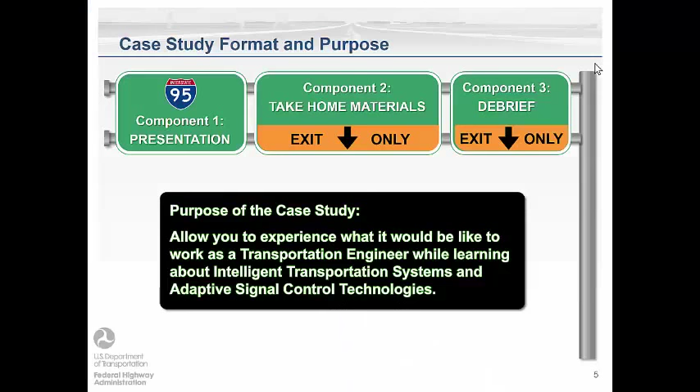So now let's move and talk about the case study. And this case study is focusing on... let's see here, and I apologize, there's a lot of early slides we don't need to worry about here. Now I'm going to move past them pretty quickly.

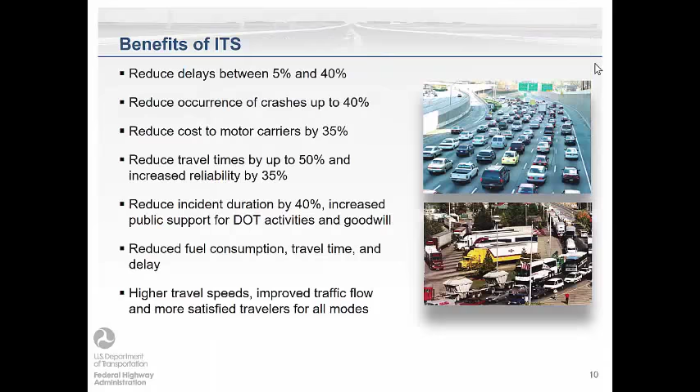Just quickly, the traditional way has been what's called a fixed timing plan, where every cycle you assign so much time to different movements at the intersection. This works well for very predictable traffic flows. We've moved in many cases to what are called actuated signals, where you have a basic timing plan, but you can extend the length of phases based on vehicles actuating detectors. In other words, if you have a green phase and a vehicle comes in within some amount of time and actuates that detector, then that phase will continue to allow that vehicle to pass through. So the idea is to better manage a little bit of unpredictable traffic flows. So you'll see a lot of actuated signals in use, and also there's still plenty of places where you have fixed time signals.

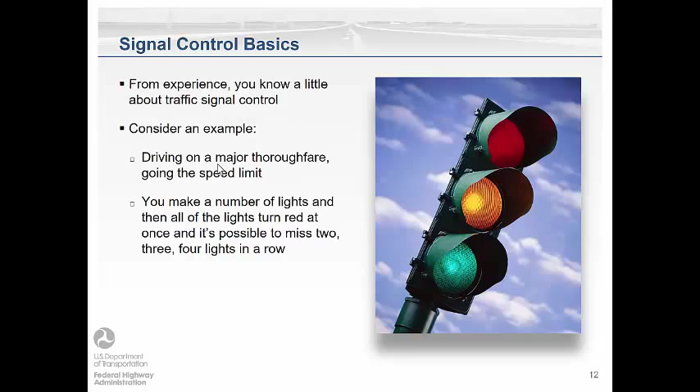There are times, I don't know if you've noticed, when you have an emergency vehicle come through, that gets a preemption, but then it really affects the coordination of signals for a corridor for a long period of time. So this is another issue here in terms of signal management.

Just to fill in the gaps here, we talked about time-based, where you had a control plan based on time. We had traffic responsive, where you're trying to manage more based on actuation, responses to traffic flow. Traffic adaptive is what we're going to talk about in this particular module.

In traffic adaptive, what we're really trying to do is the highest level of coordination. There are physical connections between your intersections and the algorithms where you're looking at demand and modifying your signal timing plan on a real-time basis. So you're constantly looking at what the actual demand is and modifying your plan to meet that demand. If you're in a very predictable corridor, traffic adaptive does nothing for you, because it's predictable. You're not going to be adapting because there's nothing to adapt to.

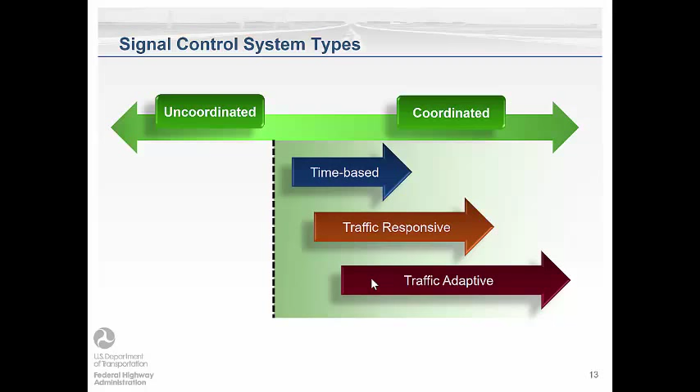If you're in a corridor where you have lots of fluctuations, this can be very, very useful. Again, what does traffic adaptive signal control need? It needs a higher level of input data - what are the demands out there? It needs a better controller to do the search and the optimization. But it's certainly something we can do today with the technology we have.

Because typically they are running fixed time because you have very predictable, highly congested areas. You really can't play around with timing plans to favor one corridor or another - every direction has high demand. But the message here is that there's a lot of work to be done, and there's been a lot of attention paid on using ITS, the idea of better detectors, better monitoring, higher level of computing performance to better adapt signals to the current demands.

We're going to talk about that in this case study. For example, we're involved right now at UVA in what's called the MMITSS project, the Multimodal Intelligent Traffic Signal Systems project, which is a connected vehicle-driven adaptive signal control system that's being prototyped in at least 3 states now, in California, Arizona, and Utah.

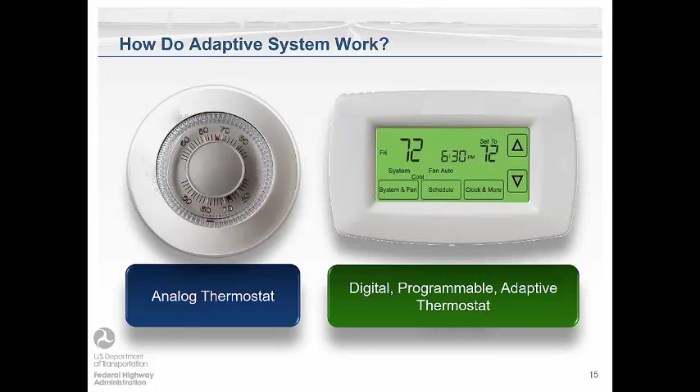Moving on from the Los Angeles example, adaptive signal control technology is effective when you have varying levels of demand that you want to be able to adapt to quickly without doing a retiming effort.

How much does it cost? The cost is at least $50,000 per intersection above the current infrastructure. Where does that cost come in? Primarily from the higher level of detectorization, also from the software complexity and complexity of personnel to set this up.

Now, the issue is this cost should be going down as we get to connected vehicles, because we're going to have a higher level of resolution of data that's not coming from sensors, it's coming from the vehicles themselves. So we really think this is something that's going to be very cost effective in the near future. In fact, even without that, $50,000 per intersection is a drop in the bucket compared to what it costs for construction of lane miles. So this can be a very useful system.

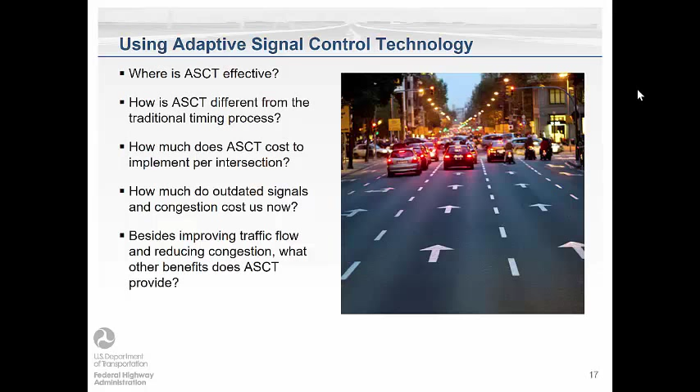So again, what does an adaptive system do? What it does is compare the demand from one time period to another and try to figure out what works well. Does what works well at 5:30 also work well at 3:30? Perhaps there's a traffic pattern that matches that time, maybe it's a Friday with people leaving early, or maybe there's a special event. In many cases, you're trying to find patterns that match pre-timed patterns in your system that you can adapt and quickly modify to, regardless of the time of day.

The purpose of this case is not to get you to a high level of knowledge of adaptive signal control systems, but rather to help you work through some of these issues at a higher level. It's also important to note, as you saw in last unit's application description project, the SCATS system from Australia is an example, one of the oldest examples of a good adaptive signal control system, which you've already seen in this class.

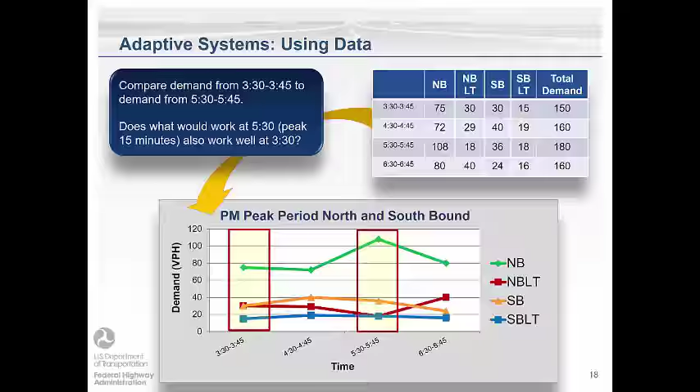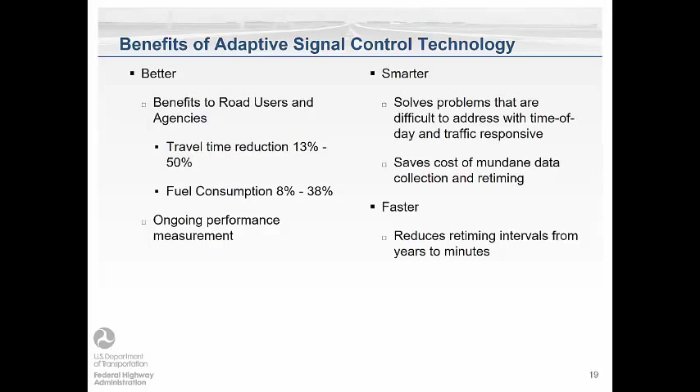How does this benefit us? First, it can reduce congestion and fuel consumption. It can keep us from having to do so much work on traffic timing. The current state of practice is you need to go out every year or two and retime your signal system, which involves a lot of counts and optimization with something like Synchro. If we can have this automatically done on an ongoing basis, it's more effective and more cost effective.

What are the challenges here? It is more complex, which is difficult sometimes for DOTs to manage, and requires personnel ready to handle this. Sometimes your current traffic control system, your controllers, your detectors, are not able to handle the needs for an adaptive control system. Again, it's new, and anything new is difficult sometimes.

This second to last bullet is important: arterial volumes might not fluctuate enough to warrant ASCT. It might not be the best choice for all locations. I can tell you one of the leaders in this area used to always say he would take a well-timed fixed time corridor over an adaptive system any day, because his thought was if you have a corridor that's predictable, with pretty much the same patterns day to day, and you put a lot of effort into developing a good timing plan, that will always outperform something generated on the fly with an adaptive system. So the point is there are many corridors that don't fit that description and need this level of adaptation.

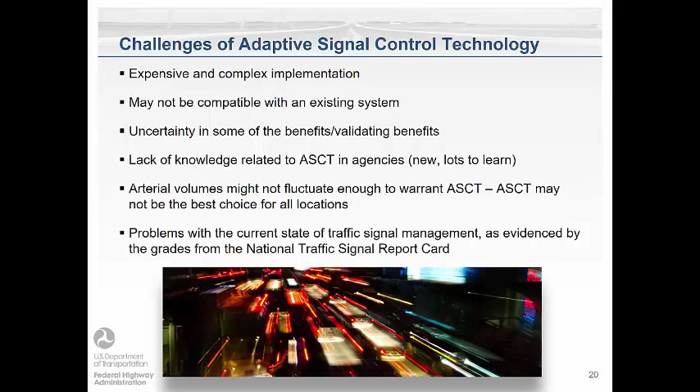The next slide is really getting into the case study itself, though I've lost some of the notes here. What I'd say is think about this with respect to the systems engineering process. How do you put this together in a systematic way? How do you look at the needs first? How do you look at the interfaces, etc.?

Again, a goal-centered approach, starting with a high-level goal, moving down to technical tactics. So for this case study, you're playing the role of a junior traffic engineer in a city known as Hamilton, where you have traffic problems on the main arterial, and you have proposed an adaptive signal control system at 15 of the intersections along that main arterial. You're playing the role where this is going on, in this particular scenario.

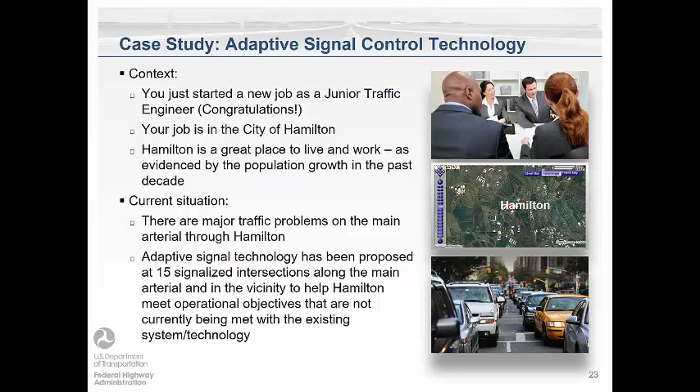So you've got 4 tasks. The recommendation is about 30 minutes per task: looking at your role and responsibility, looking at the patterns themselves in existing signal architecture, looking at operational strategies you can use, and finally comparing and contrasting adaptive and non-adaptive technology systems.

So that's a quick run through the case. Again, you're going to be doing this by yourself. Basically what you're doing in this scenario is reading the material you're given, stepping back, thinking about it, and responding to it. This is a little different—you're not going to be doing any data analysis like you did for the last case.